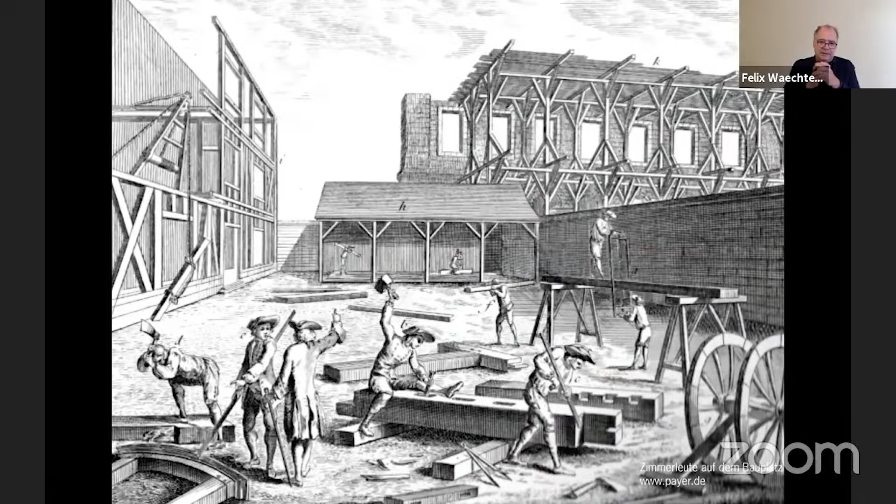Recognizing that in the discourse, in the debate on climate change, probably we suddenly rediscover the old building material wood as one of the building materials of the future, since in contrast to the other building materials as concrete or steel, wood is the most efficient method to avoid emissions.

And on the other side, we recognize that wood allows us also to renew the building process by using modern methods and digital tools in the prefabrication, for that which used to take place at the joinery place, the splitting, the sawing, and cutting to length.

And thinking about the next generation of wood architecture, rethinking construction, we also need to think about the culture, the new culture of design, strengthened by the beauty, the poetry of wood that wants to be touched, smells, breathes, and tells us a story of growth and the patina of use.

One of the three thoughts I tried to share in April, I titled Coherence, the unity of content and form as potential in a new design culture, since wood demands and enables a strong grammar, a serious connection, a relationship between the layers, between the supporting structure and its wrapping, between the construction and the interior, so that the interior does not decline into a moody, fashionable staffage.

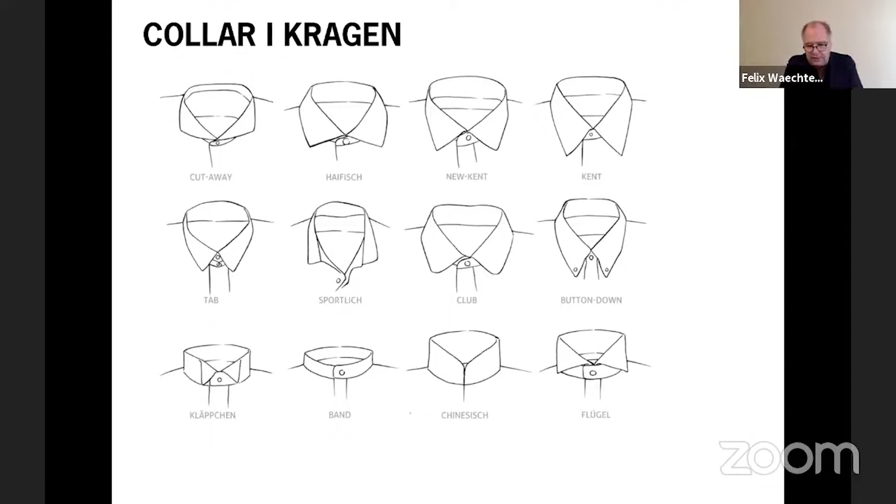The potential in wood architecture is to use the joinery, which enables a close-up view to enrich the architecture.

And the third thought I gave in April was titled With the Virtue of Simplicity, demanding a certain timelessness, a beauty achieved in itself, in particular in the diversity of our age. I'm convinced that simplicity and modesty are still elementary and reliable goals.

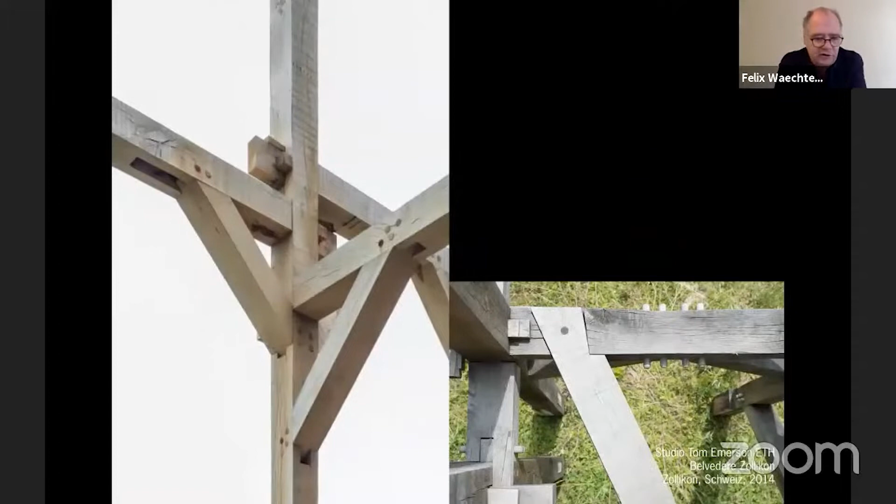While in fluid concrete, the structural logic, the flow of forces, the vertical and horizontal load transfer, and the stiffening is denied or remains invisible, in the linear elements of wood constructions the flow of forces remain visible and allow the joinery to determine the detail.

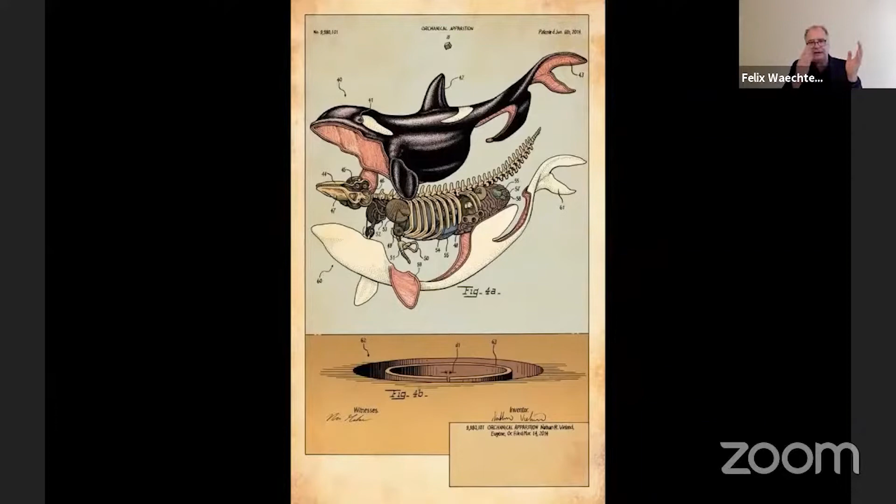So by rethinking wood architecture, one potential is to rediscover the structure as a formative element in the interior, like here in the anatomy, inside the whale, or inside the rabbit. The skeleton, the anatomy, as a formative element of the interior, but also as a supporting and determining structure of the envelope, of the skin of the whale or of the rabbit.

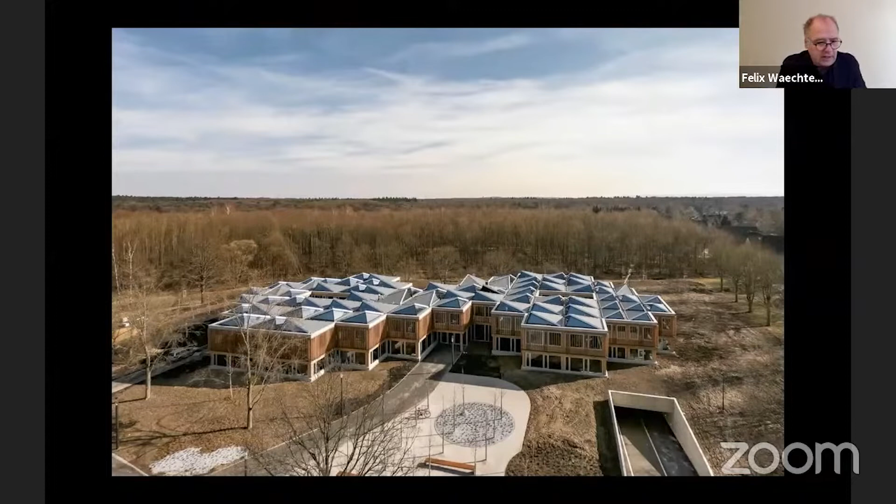In the Academy for International Cooperation in Bonn, the first project I wanted to show you this morning, federal employees are prepared for their work in emerging countries with language courses and the teaching of regional culture.

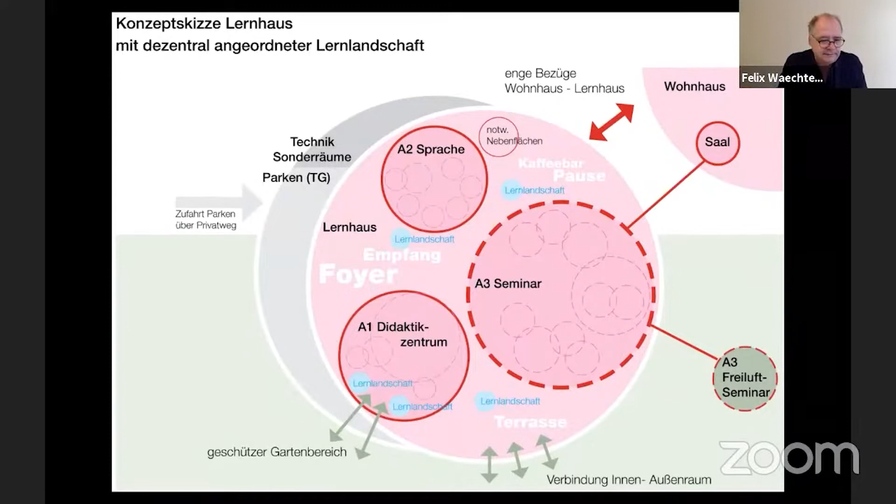There was a competition, and in the competition they gave the didactic concept based on a learning landscape for self-controlled learning processes, as well as separated seminar rooms, especially for the learning of language skills, and a media library. So a learning concept that follows up the discussion we are currently taking up in school buildings with the question: how can we learn tomorrow?

Recognizing that frontal teaching does not correspond to the different learning speeds of kids or students, especially in increasingly heterogeneous societies, and that in a world where you can get any information everywhere, every time, we need to recognize that we need to teach more skills than knowledge.

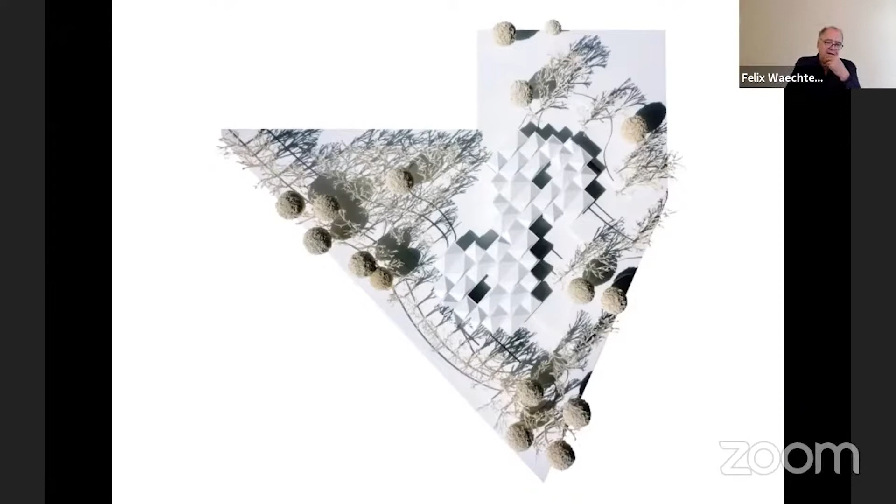So we were looking for an architectural language for this learning landscape, which expresses the restlessness of learning, the searching, the reflecting, the curiosity, and the looking in all directions. But beside that, we thought it's important to do this a little bit disciplined and with a systematic order.

The site we had to deal with was in Bonn, in Bonn-Röttgen, on the edge of this wonderful so-called Kottenforst. The site offers ideal conditions for this learning landscape: calmness, concentration on the one side, but also openness.

Adjacent to an existing seminar building, the so-called Andreas Hermes Academy, with its characterful roof drawn far down, which had been renovated and converted into seminar rooms and a residential building parallel to our project. Right next to this building, we developed a freestanding multi-tiered structure, intended to express this diversity of learning in a lively manner.

The floor plan, the upper floor, is designed like a net, a modular learning landscape, an open communication zone, like two rings, two rings around, every time around a little courtyard.

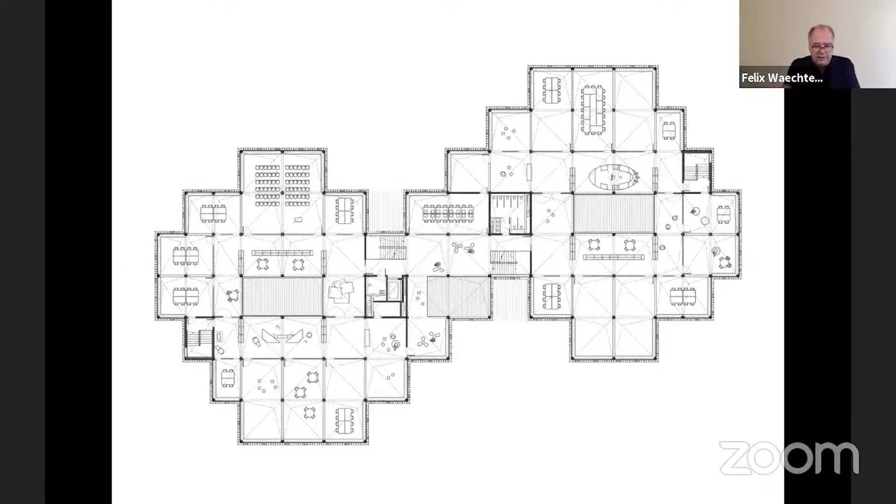In these two rings, this is a learning landscape for learning alone or in small groups, with insights to the seminar rooms, which are at the edge, and different sizes of language rooms, and outlook in all directions into this wonderful landscape.

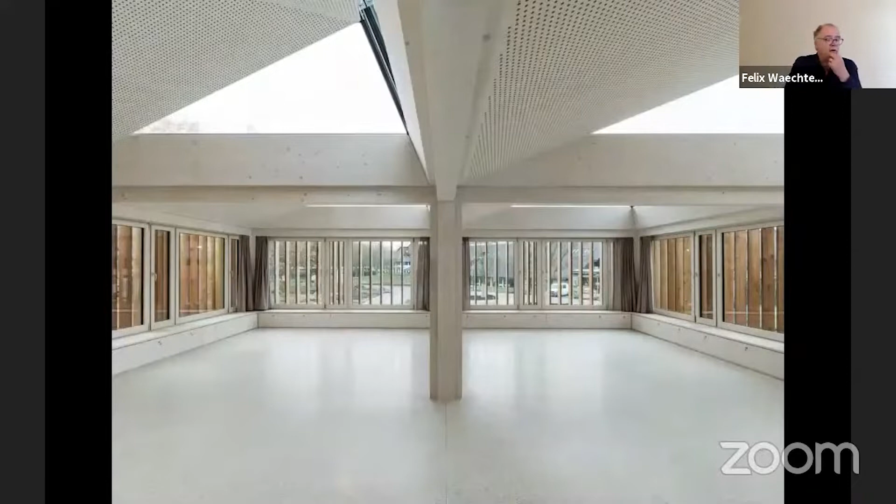For that, the areas can be used as an open learning zone without any corridors and fire protection regulations. The building is divided into 5 units with about 400 square meters each. We were looking for a friendly, light, diverse atmosphere, needed for relaxed learning and teaching.

To illuminate the deep room zones, the roofs on the upper floor are unfolded, pyramid-like, and the anatomy, the skeleton, the structure is built out of a basic 2-story element.

Here you see these 2 stories, the first floor and the ground floor, with the ceiling supported by these beams, by the surrounding rooms, with the ceiling constructed statically just like a hollow box with a statically effective top and bottom cladding to reduce the construction height, so that it's a very stiff and very stable box.

You see it here in the section, the top and bottom cladding and the beams inside. The bottom cladding is perforated so that the ceiling is load bearing, but it's also an acoustic element at the same time, combined and integrated, instead of different layers or additions as we do in solid construction.

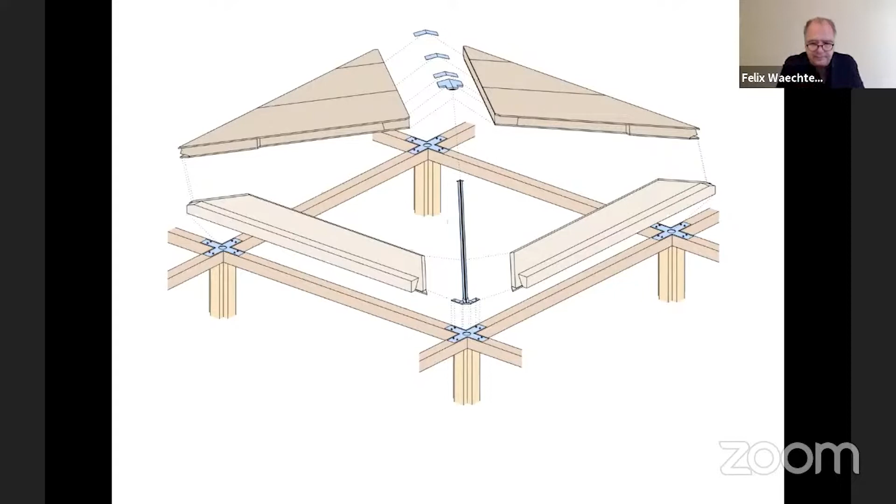Analogously, the pyramid-shaped unfolded roof construction, also with top and bottom cladding, is supported at the highest point by a very small thin steel tube. These ceilings are arranged like a chessboard in alternating directions, so that the beams of the grid are always fully utilized.

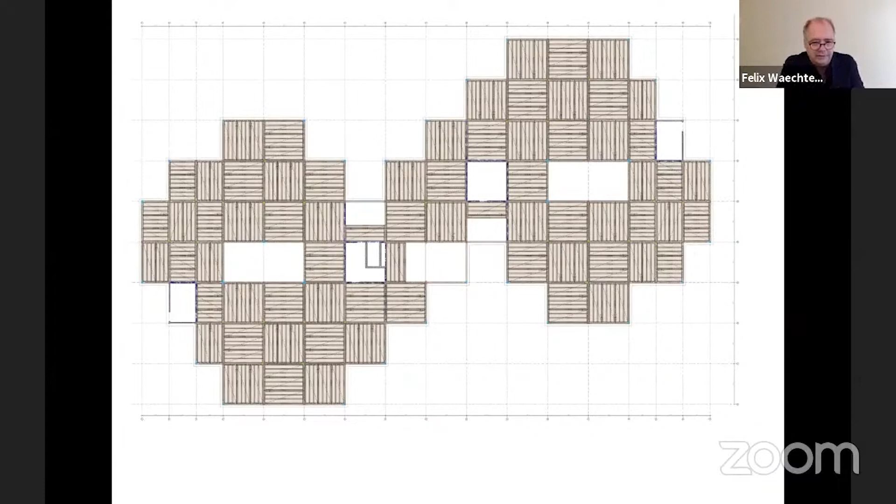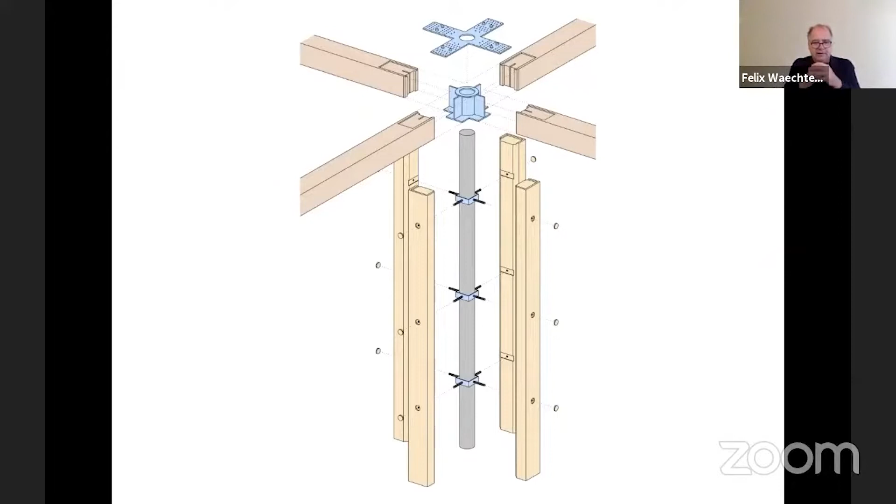The cross-shaped pillars enable easy connections of all elements, and they enable integration of diverse media, especially rainwater.

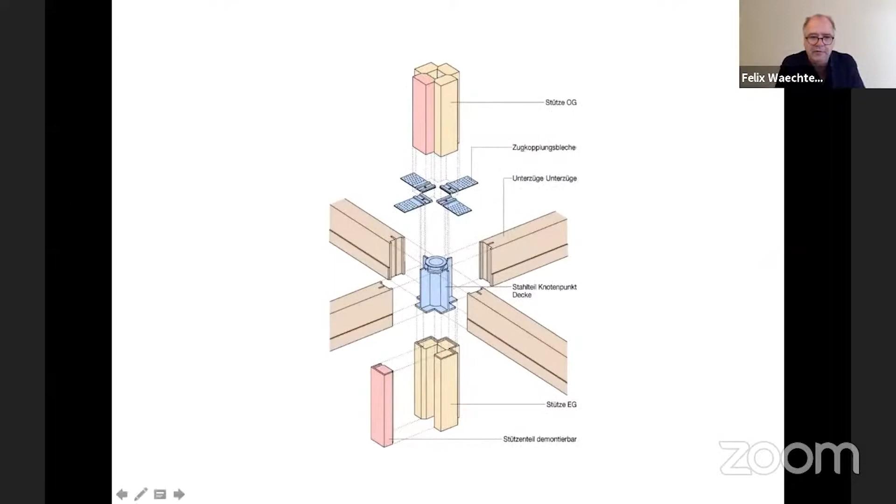Therefore, one of these elements is removable.

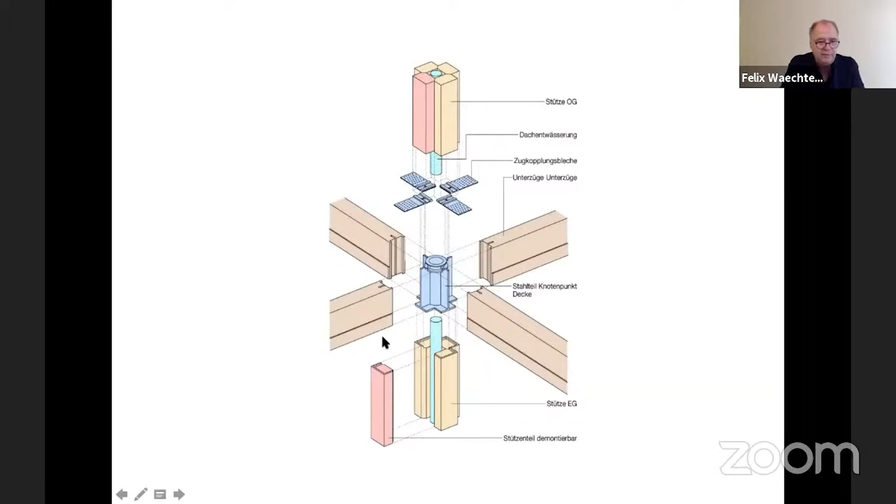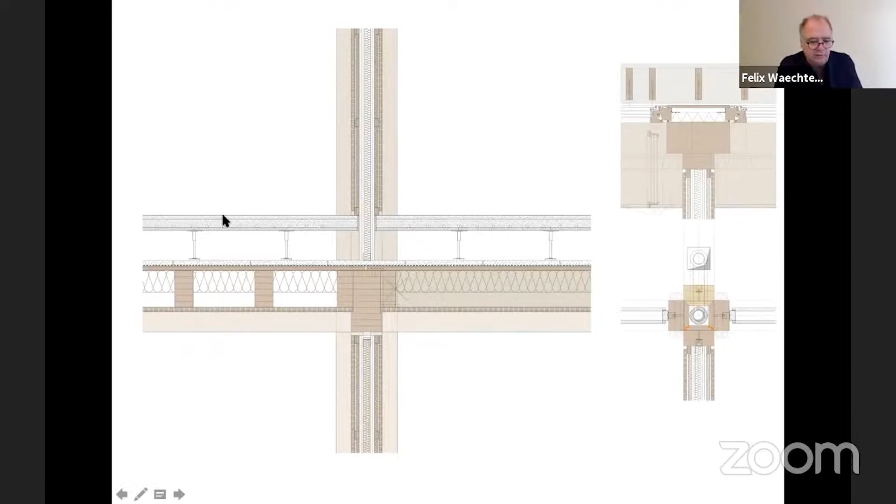Looking at the section detail, you see on top of these ceiling elements some concrete slabs normally used on walkways, placed on the ceiling elements to ensure noise insulation between the ground and upper floors. Within the raised floor, installations are managed, and on top we have a conventional floor construction used for heating and cooling.

In this raised floor we have the supply of air, where every part of these grids can be reached. We try to reduce the amount of air, so it's only transported when the room is really used.

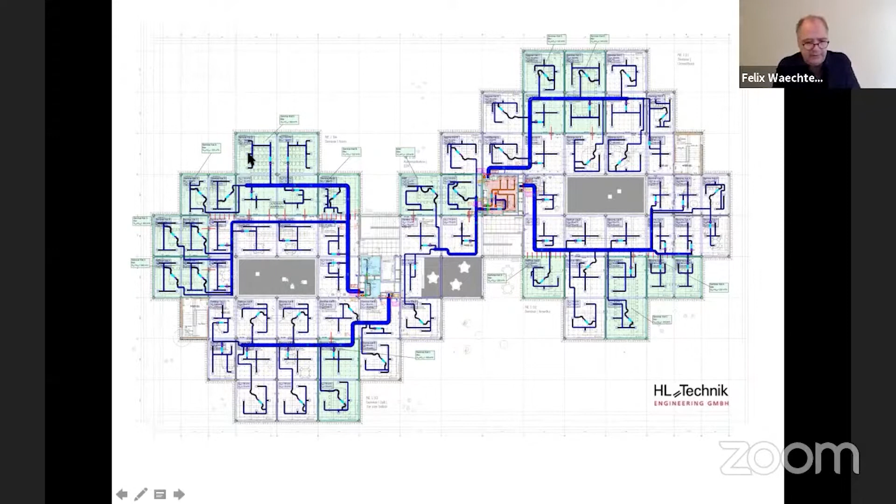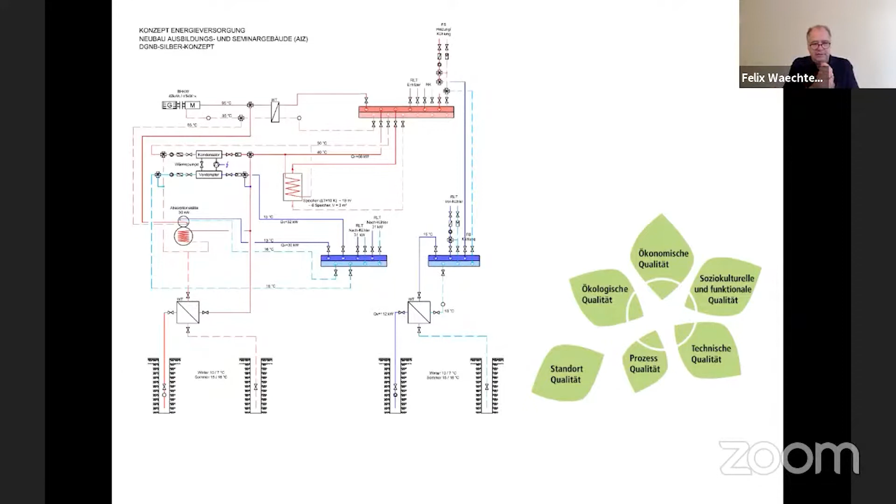The sustainability of the building is proven by the so-called DGNB certificate in silver, which includes an energy concept with a geothermal field as a seasonal pendulum storage, operating in winter as a heat source and in summer as a cold source.

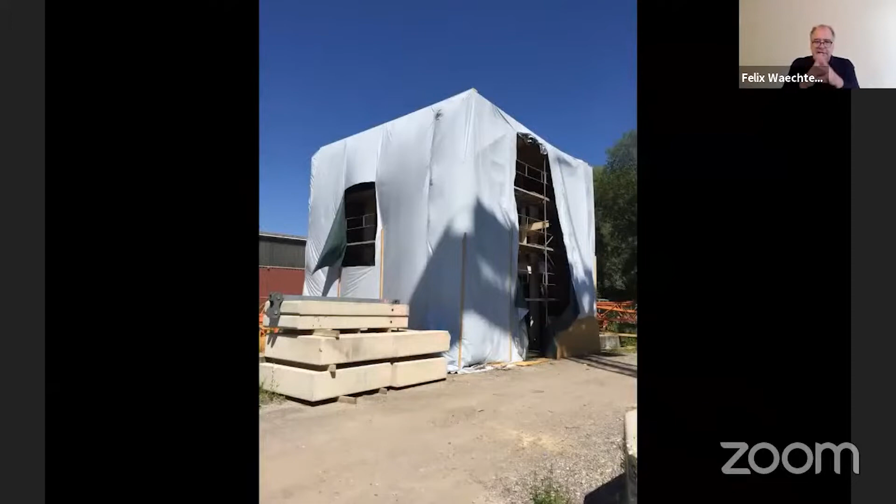Hermann Blumer already pointed out the necessity and potential of building a mock-up. So before the start of construction, the commissioned carpentry previously built one module to test the construction, the mounting concept, and to check surface qualities, as well as to optimize the joints.

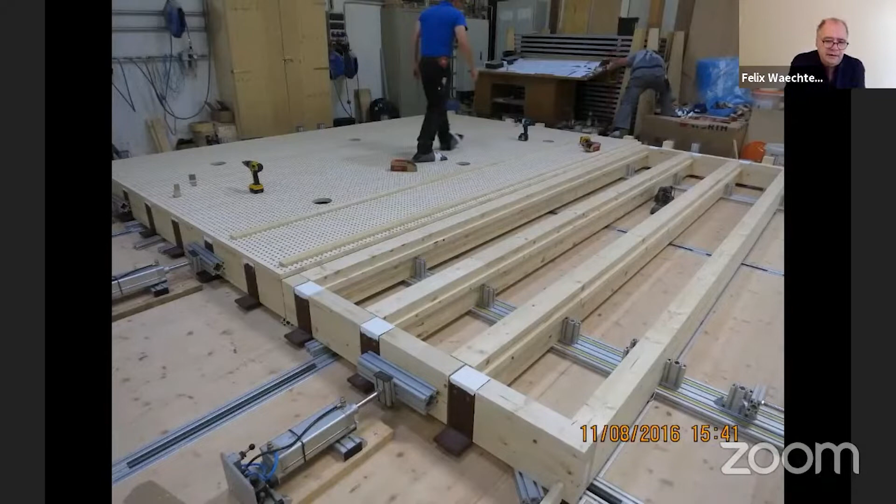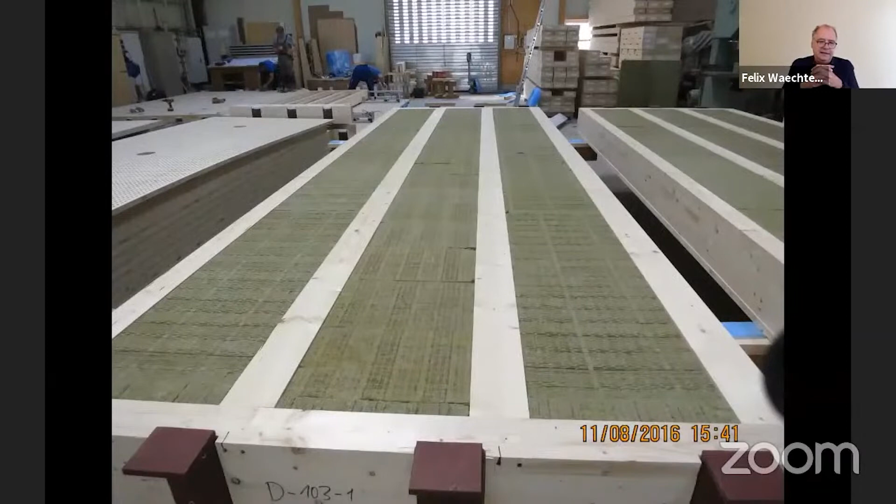The ceiling elements are individually CNC perforated according to our plans. This used to be unaffordable some years ago, but with technical improvement, it's nearly free. Mineral wool is laid in these elements for acoustic absorption.

In timber construction, in developing the structure, transport and assembly must be considered at an early stage in the planning process, and in particular also the weather protection of the wooden components.

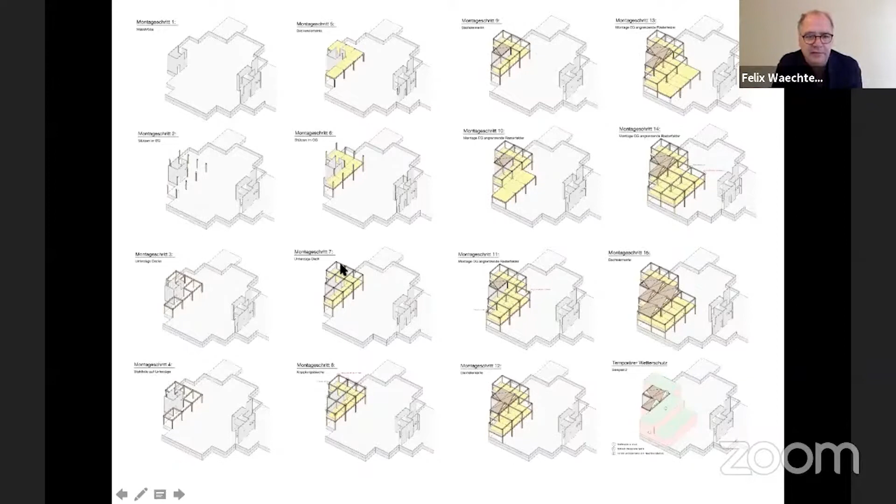For weather reasons, the mounting is not horizontal like in concrete structures, but vertical, as you can see in this story, where you can see how the building process was managed: first putting up the pillars, then the beams, then the first ceiling elements and the roofs, and then going on.

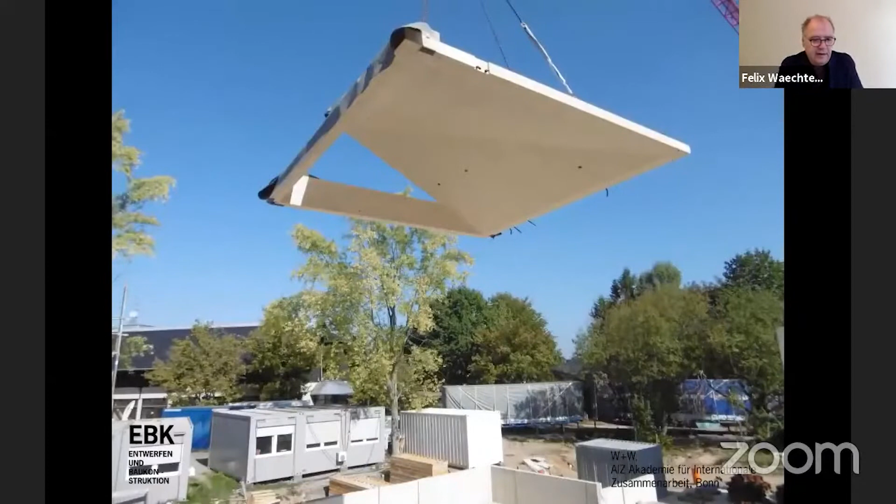The mounting of the elements, here you see the mounting of the first ceiling, is like a Lego-like process, and the roof elements are previously sealed on the ground floor and just put onto the structure.

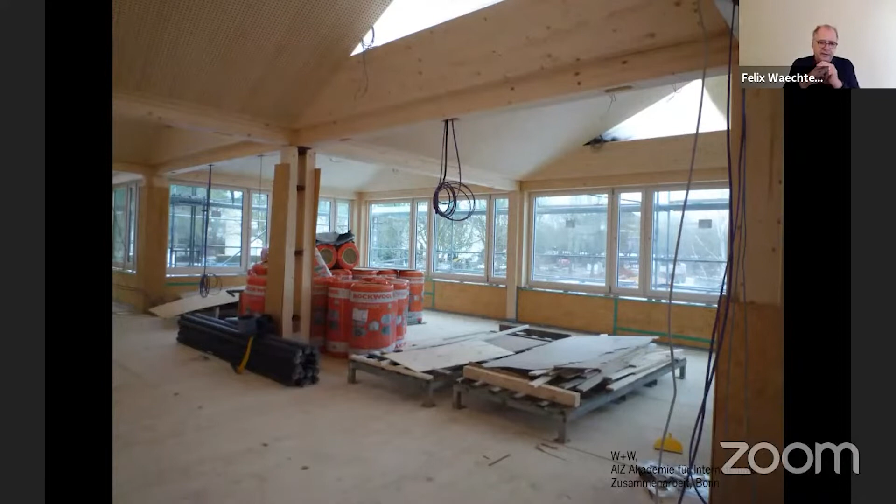Because of the high precision, all interior elements had been prefabricated and installed step by step. By finishing the structure, the skeleton, the anatomy, the physiognomy can be felt everywhere.

The connection between the supporting structure and its envelope, the wrapping, the skin, the veil between the shell and the interior can be felt, so that the skin is not the result of a moody composition or fashionable staffage.

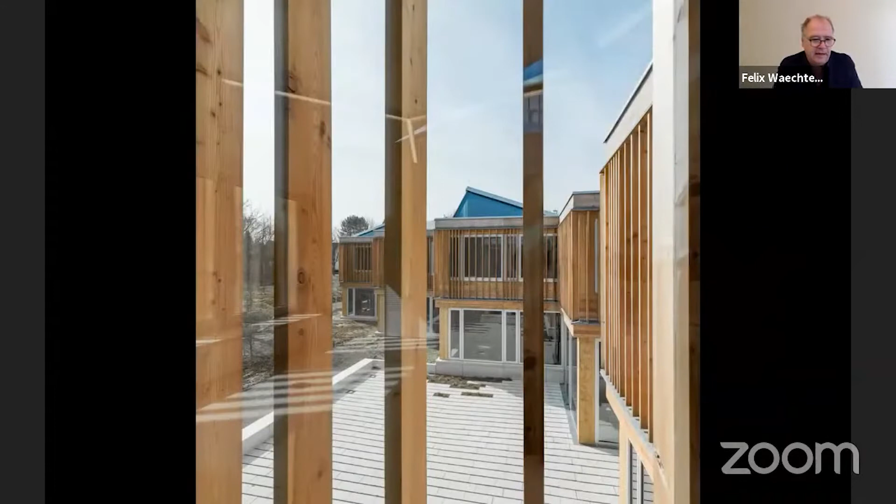With a low height and a pavilion character, the building nestles well in between the existing buildings, the housing neighborhood, and the landscape. It interlocks with the landscape and appears small and in scale due to the stepped and folded facade.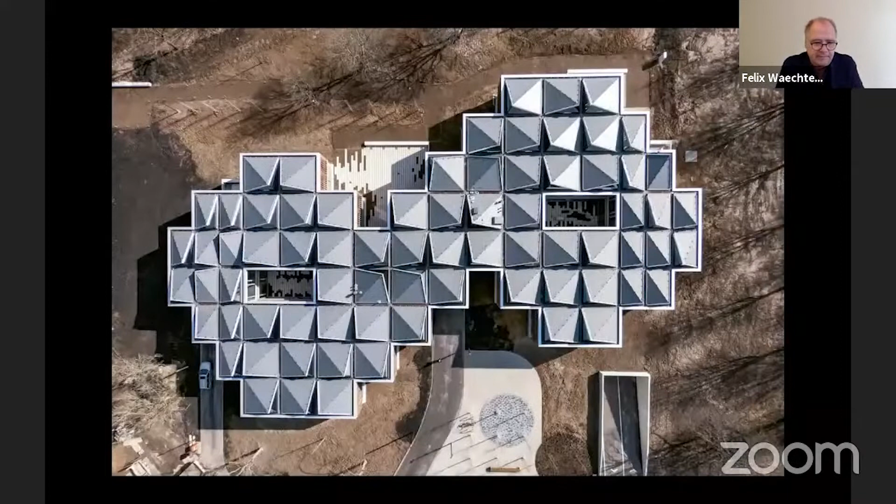Consistently, everything follows the structure, the logic of the concept, without anything being added and without anything removed. So content and idea, form, structure and design are one. We tried to transform this idea of how to learn in an increasingly heterogeneous society, the search for rooms which allow differentiated learning, into a much bigger scale for a school center in Regensburg.

In fact, it's a project for two schools, a primary and a secondary school, and a big gym. It's a very difficult site because the site is sloping, which is hardly visible on this model.

The site is sloping about 8 meters, so it's 2 stories, and the volumes we developed are arranged like a necklace, opening to a series of outdoor spaces and grouped always around these courtyards, forming the playground for the pupils.

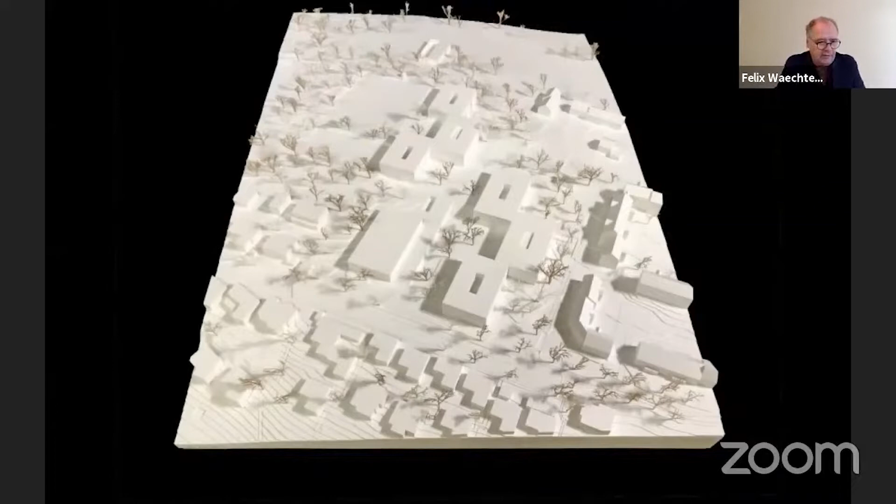With wonderful views from the courtyard and classrooms onto the historic city of Regensburg, the supporting structure determines the appearance to the outside with a dense grid.

And this dense grid allows varied and changing uses on the inside. Inside, we offered pedagogical usable zones around these courtyards, these interior courts. In fact, these are courts, and this is an atrium in the middle, giving space for project-related and group-oriented learning outside the classroom.

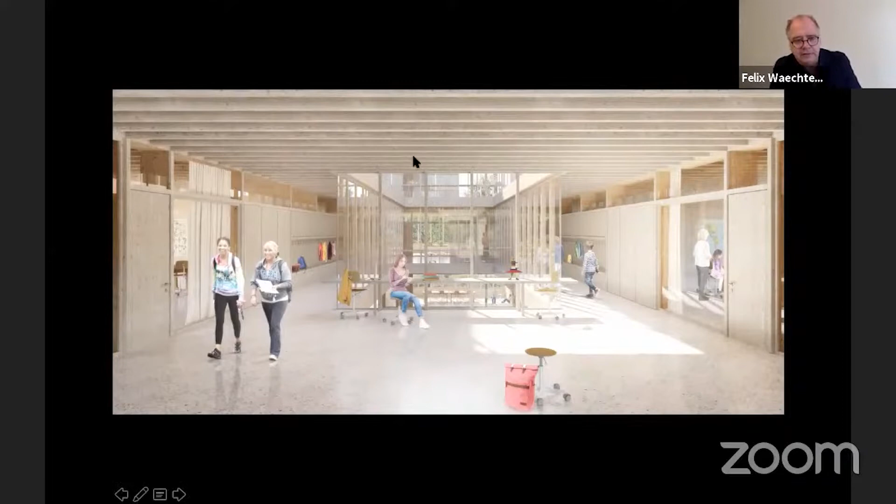But instead of the grid in Bonn, the load-bearing structure gives rhythm and scale on the inside. Here you see the load-bearing structure, but also on the outside, where the structure is put on the outside. It gives a certain plasticity, which is technically useful to avoid overheating.

So this is the pillar. This piece is the pillar, pretty tiny because it's put every meter, and which is cladded outside for weather protection. And this is also the cladding. So this piece is only the structure. And you see the beams inside here.

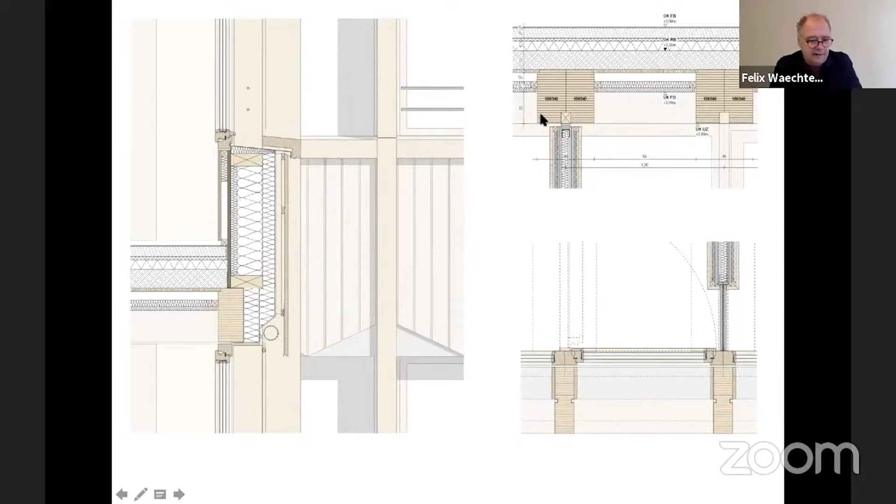So this scheme is rather strict, but it's kind of a frame or a passepartout to be possessed by the liveliness of the kids.

And we are also working on these questions of learning environment in Gießen, where we just recently won a competition for what we call a Berufsschule, a school where young adults are trained in between or beside their apprenticeship.

In the Protestant Community Center situated in Wiesloch, south of Heidelberg, the structure of these slightly diagonal wooden beams characterizes the interior and unfolds the spatial atmosphere and poesy of the common space.

The common space here in the ground plan, the common space which had been asked for in the competition, is set like the central heart, the central organization element, with a courtyard just beneath, around an existing tree. At the beginning of the competition, they said you can do everything, but this tree has to remain, so we planned a courtyard around this tree.

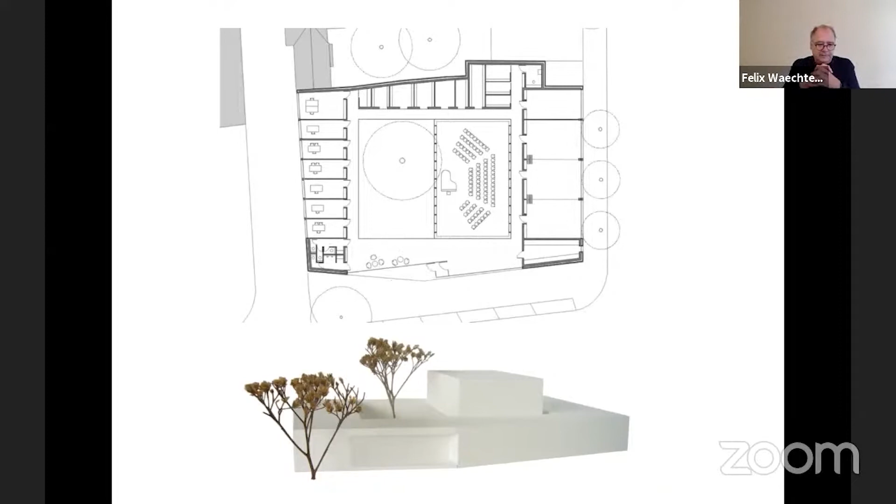This heart is detached from the ring like a cloister. So all the other rooms are arranged around this central room, with the administration rooms on the left and the group rooms on the right, storage room on the back, and the entrance and entrance hall down here, which opens to the street with a large window.

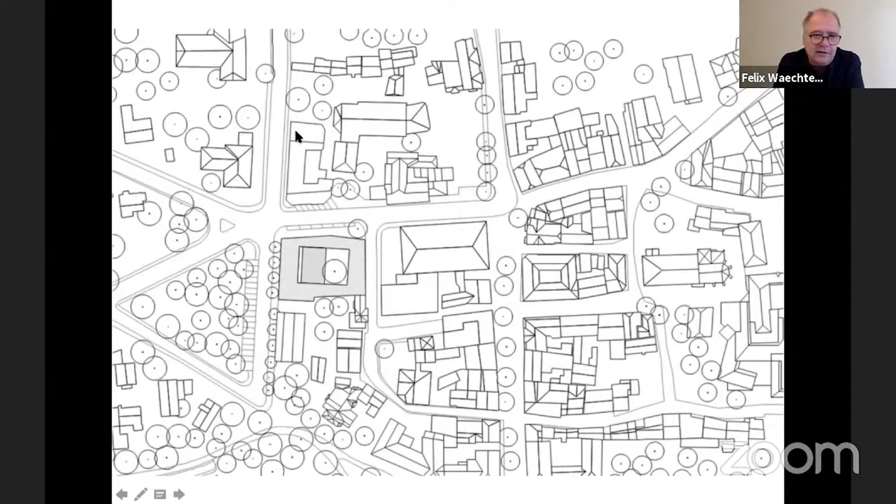In the heterogeneous context, this ring-shaped figure mediates, this urban figure, between the various scales and heights of the neighbors.

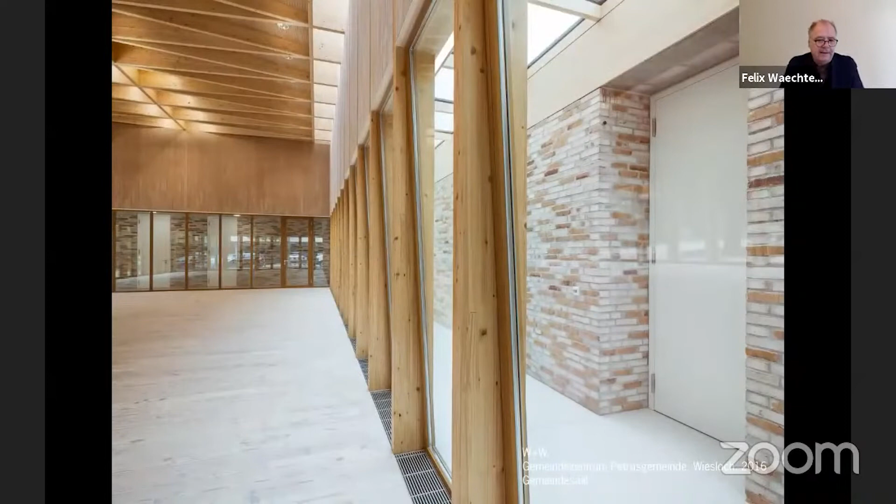Like a wooden instrument, this central room is detached from the heavy base made out of brick, this exposed masonry, with a concrete ceiling.

The logic of the wooden structure, the detail, is not an ornament, but is developed from the doing, tells the story of the making, the junction. It's not attached, not arbitrary, but inherent.

And when you enter the room, you smell the white soaped wood. You hear the absorption of the wooden wall and ceiling panels, and somehow you want to touch the surfaces, which are so rich in texture.

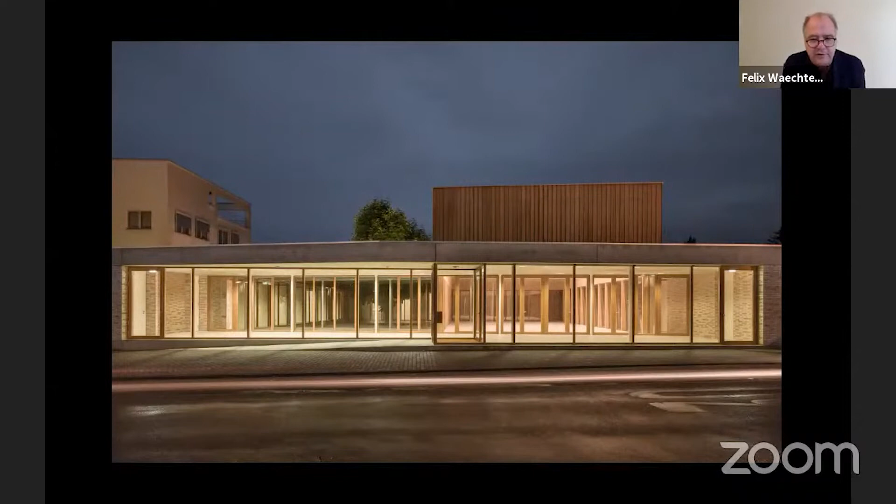In the outside view, the height of this central room manifests that the community, the getting together, is central to this center. And the foyer opens up like a big shop window to the street, to the public, to welcome and invite everybody to take part and be part of the community.

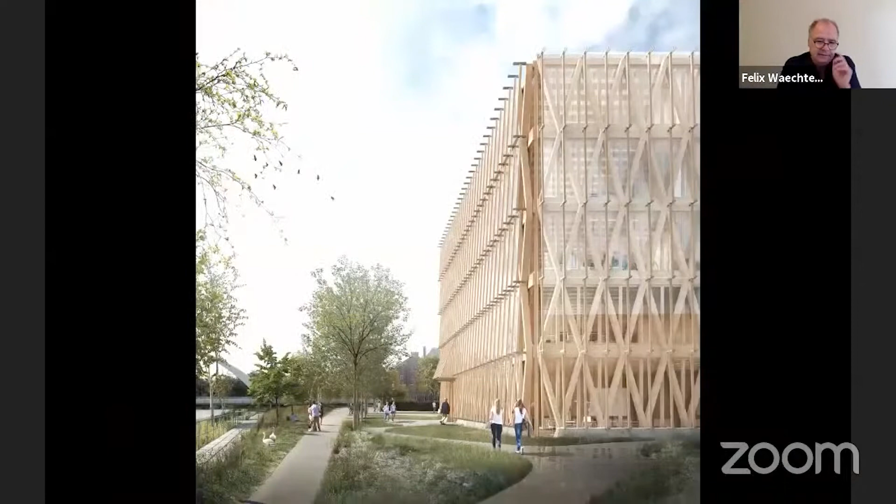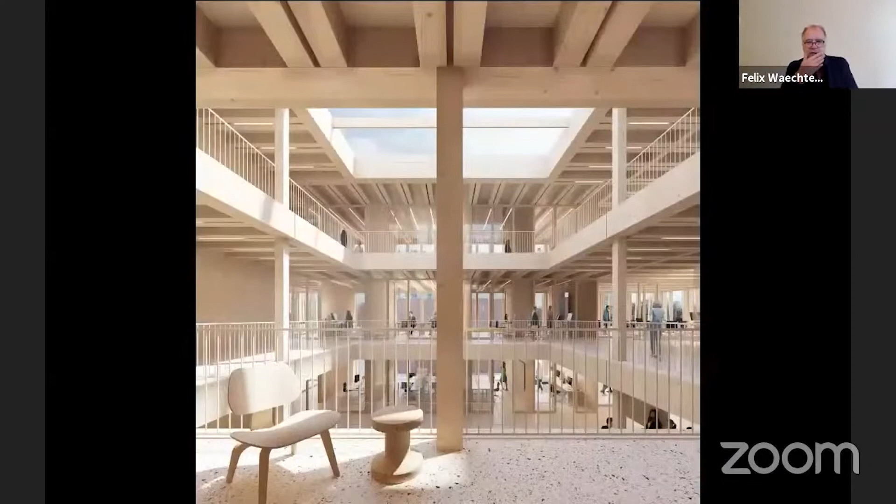At the innovation fabric, we are right now planning in Heilbronn, an office building for young startups. The logic of the wooden construction with this truss-like timber structure, this formative element, determines the character already from far away, but also on the inside, where the inventors, the founders, the co-workers and creatives come together and inspire one another around this central hall.

It's like a think tank and lounge for working and exchanging ideas with one another. That's the idea of this central hall.

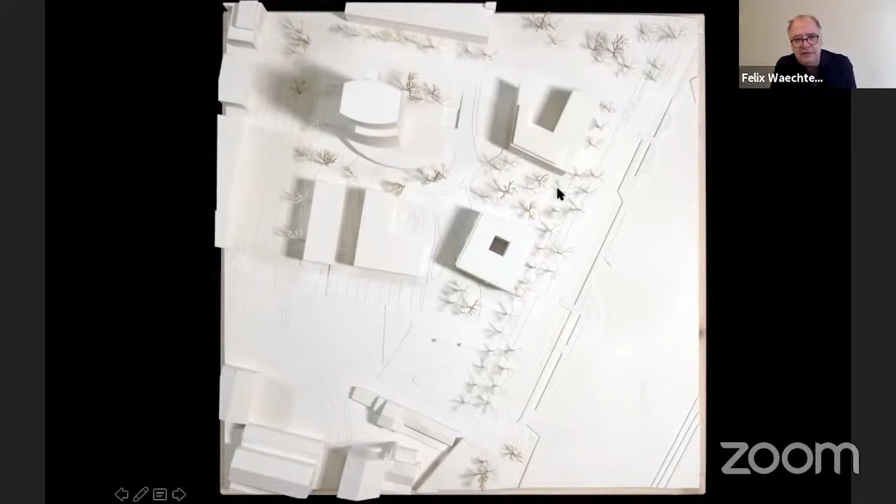In the urban setting, the innovation fabric forms the beginning of this new park, the so-called Neckar-Ufer Park. It's a conversion of an industrial zone, and the urban idea is unusual because we took over this new line, but it's slightly turned by this simple square figure, with an opening to form the entry.

The all-round transparent appearance of the square structure, without any front or back, corresponds to the mission statement of the innovation factory. The hall in the interior is the focal point, enabling easy orientation, promoting exchange, and giving different perspectives inside and outside between the offices, which are arranged outside in this ring and fully glassed into the interior.

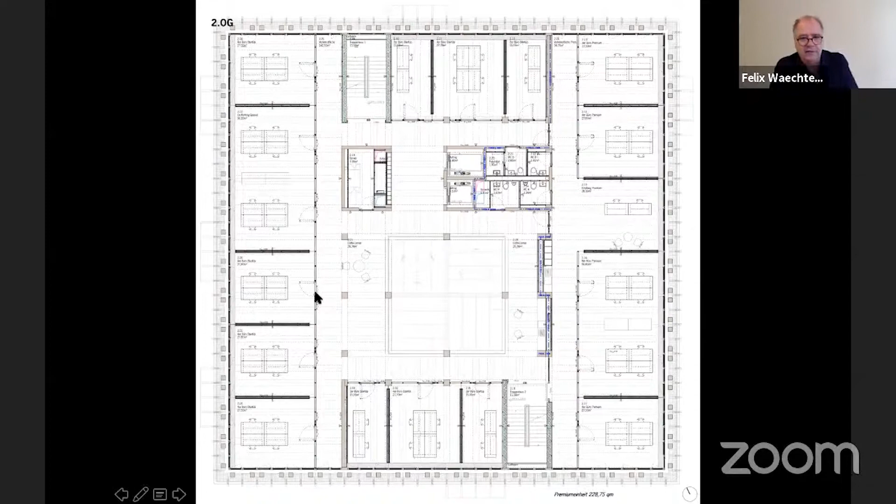The truss-like pillars outside, the facade and the wide span of the beams here allow highly flexible and adaptable plans.

Due to the building height and the open space with this interior hall, we will have to install a sprinkler system for fire protection, shown here in blue, the blue lines, which is quite unusual in office buildings in Germany. I don't know how the tradition is in Denmark and Netherlands, but here it's quite uncommon, although it's a pretty simple technology.

And it allows us to build higher with wood construction. But still, we have to build the fire staircase in concrete.

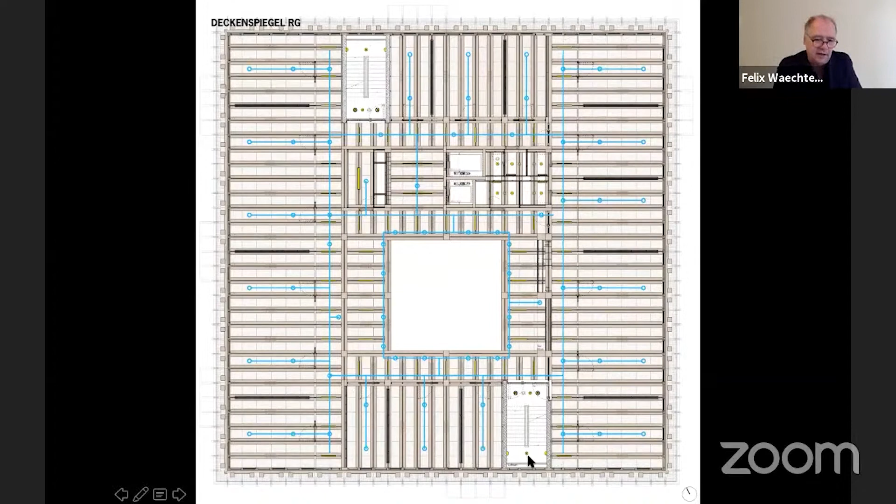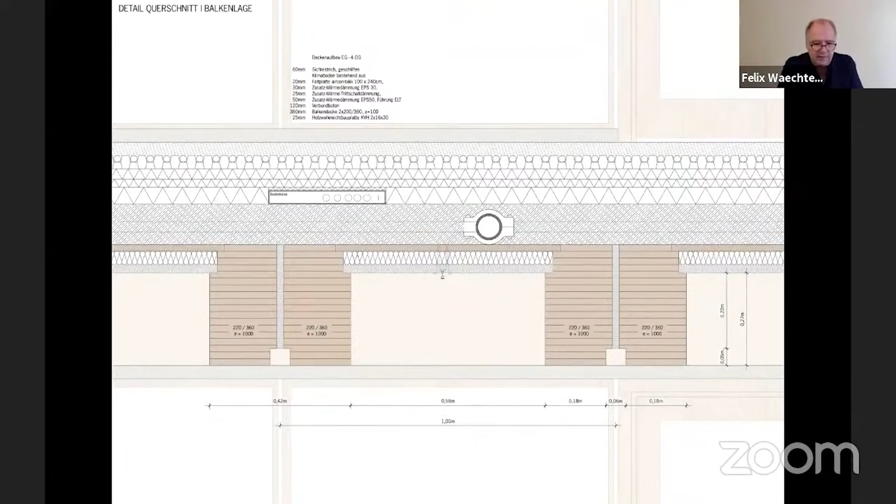So, like the school in Regensburg, the ceiling elements are constructed out of these beams, and these beams form a ceiling element with a panel out of wood chips, serving as a lost formwork for this 12 centimeters of concrete, which serves as insulation between the different users.

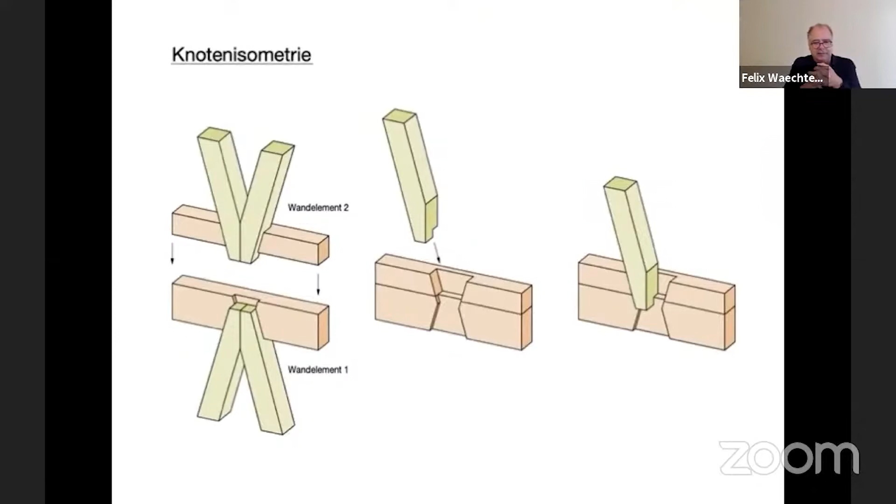And the wood construction is, we try to do without a lot of steel implants, but with pretty simple wood-to-wood joints. To protect the timber construction from weathering, but also due to energy and noise reasons, we developed a double facade, which is good to see here in this detail.

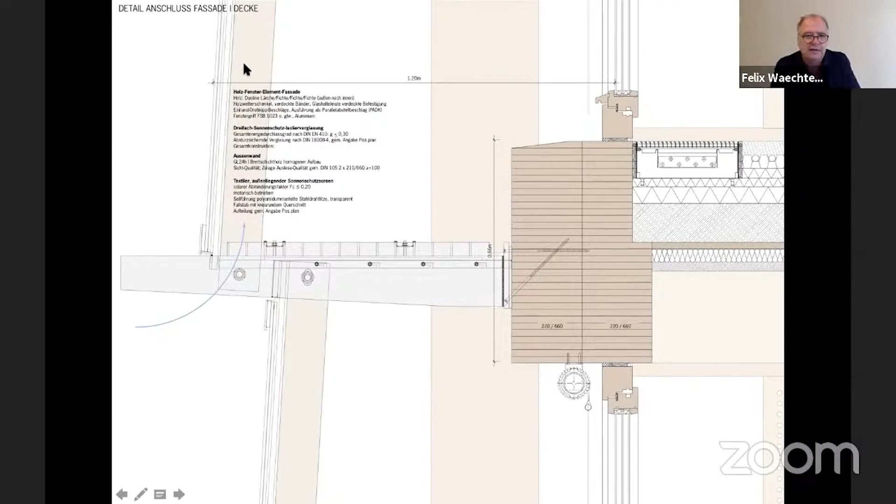Here the insulation facade, and here this wrapping with the single glass, and this outer glass is like an angled layer, and air can go in there and comes out on the top.

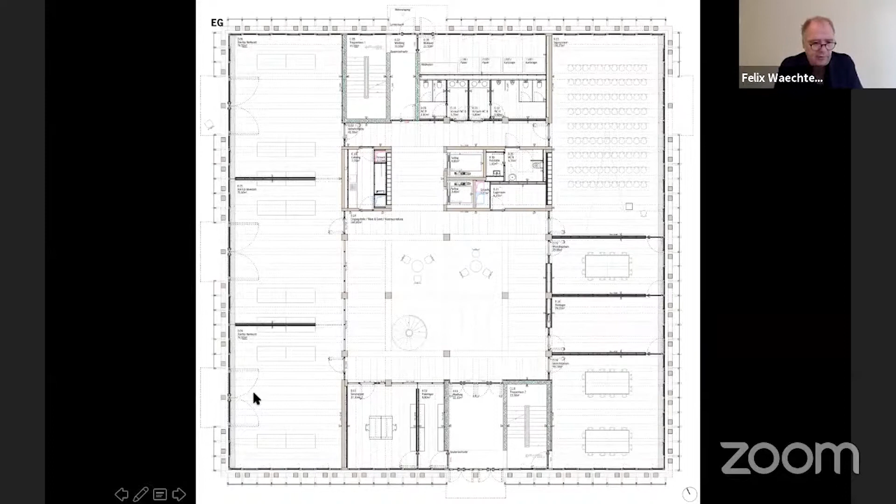The ground floor is used for conferences here on the right hand, here the entry, and on the left hand for workshops, and also here the structure, the anatomy, the skeleton determines the character and the atmosphere.

The assessment center in NEUWIED is another example of a project developed out of the structure, out of a single module, although the module isn't visible at first.

We developed a floor plan which is turned diagonally with respect to the neighboring buildings.

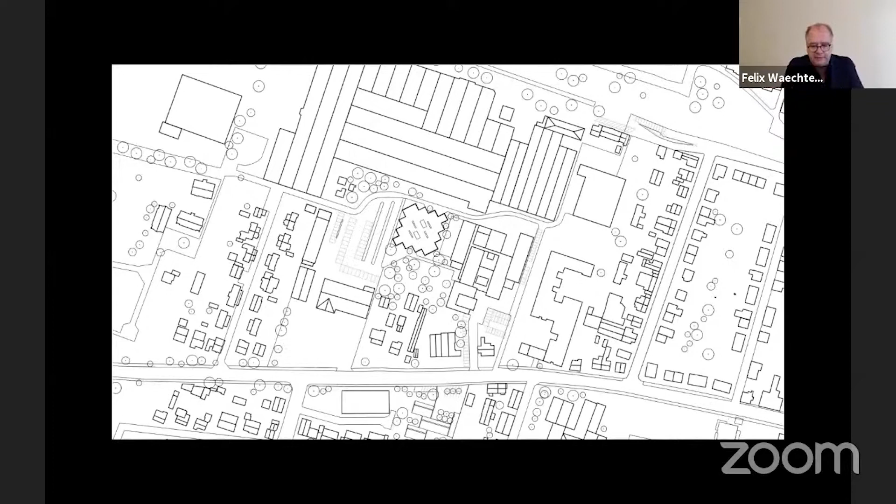But also to enable a scale which can be perceived even by people with cognitive disabilities. The potential of timber construction is to integrate systems which are added in solid construction.

A good understanding and good acoustics are an essential requirement for any learning rooms. Therefore, the ceilings we developed are similar to BONN, the first project I showed to you. They are static and an acoustic element in one.

The basic element, the starting point, are these fine wood chips. They are glued together into these panels with very good acoustic qualities, and they serve as a lost formwork for the concrete we put onto it.

The concrete provides the necessary noise insulation between different levels. So the separations between the levels, but it is also statically effective.

Unlike the pavement slabs we put onto the ceiling in BONN, which lay only loosely on the ceiling elements, here the concrete helps us not only for noise protection, but also for fire protection, and gives us some mass, so the climate is not changing too quickly.

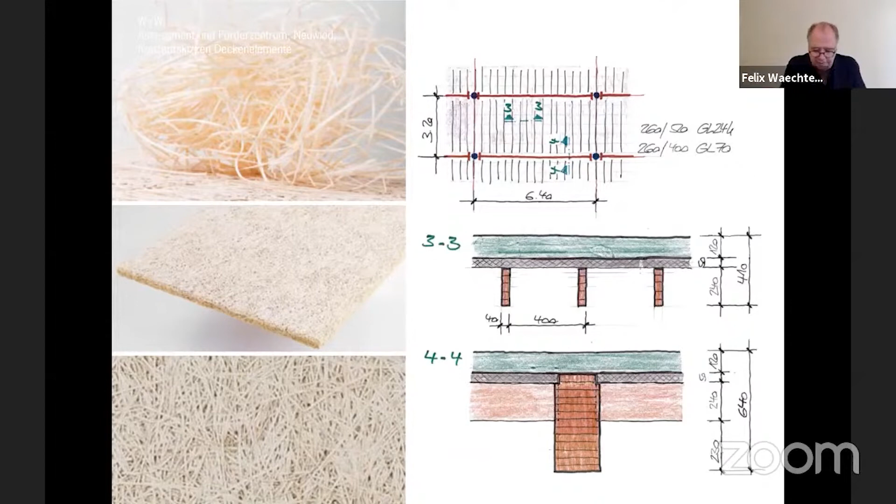From this starting point of an idea, we did develop the module of the ceiling, 3 elements, 3 meter 20 times 6 meter 40, with a frame out of wood 12 times 52.

And in this frame, narrow slats, only 4 centimeters wide, are hung in a 30 centimeter grid. And these slats support the panels of the wood chips, serving as lost formwork and to support the concrete. And screws, which you see here, secure the connection between the concrete and the wooden structure.

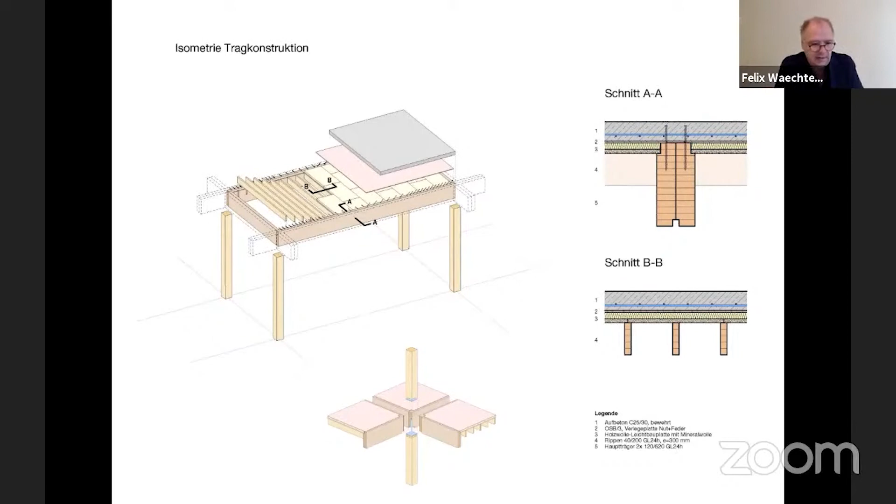These elements are assembled from its single parts, and they are put together into a whole on 2 levels, and form this quite bizarre figure with the working rooms outside.

So Arbeit, Werken, Küche, these are the working rooms, ring-shaped, and they embrace the middle zone, and the middle zone is used in the lower level as cafeteria, and in the upper floor, this middle zone is zoned and illuminated by 2 atriums.

So this is not only a circulation zone, but can be used for communication between the participants as well as between the teachers. So for individual teaching and learning.

So here you see again the plan with the working rooms at the outside, the fire circulation, and these 2 atriums illuminating this middle zone, and in between you have these rooms, the toilets and storage rooms.

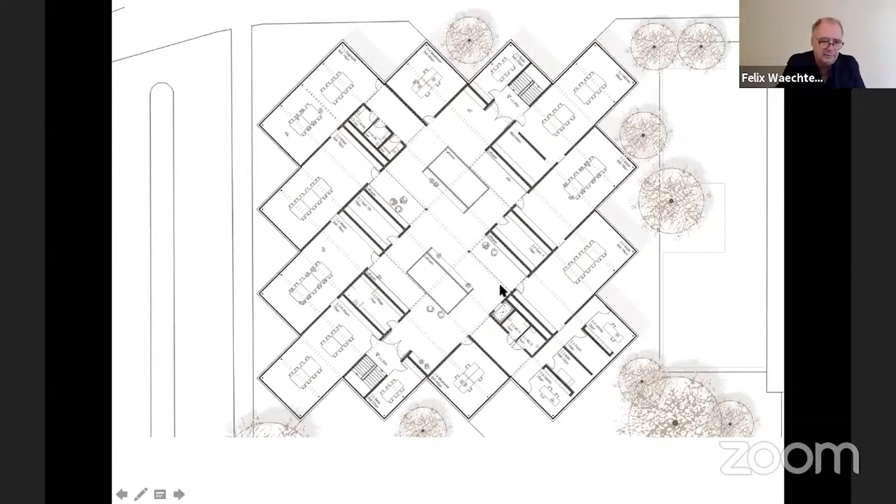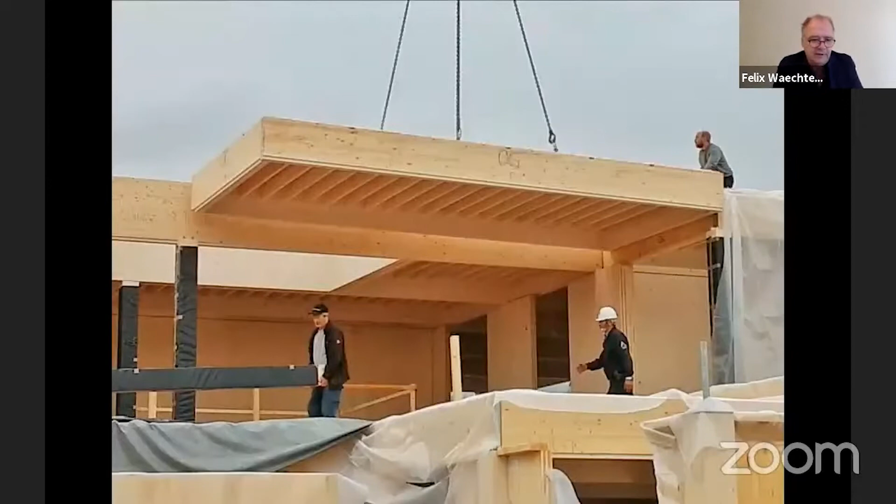These ceiling elements, 320 by 640, are easy to transport and can be prefabricated at the carpenter's space. Here's the mounting of one of the ceiling elements - you see the frame, the slats, and the panels. Due to the prefabrication of the ceiling and wall elements, the mounting could be finished in only 3 weeks. 4 ceiling elements are supported at their corners by wooden pillars, 24 by 24 centimeters.

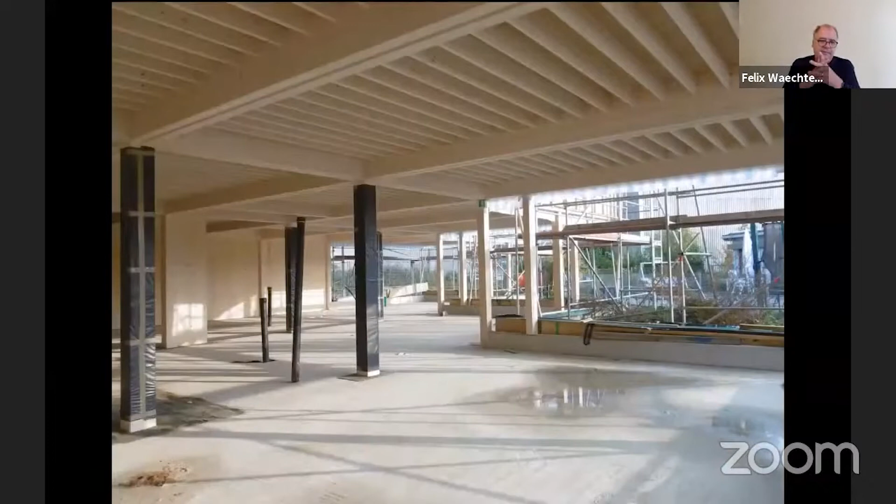They are put together into an orthogonal structure. Its expression is characterized by this fine rib structure. Here's a look into the upper floor, with this one of the atrium, and on the right is the second atrium. You see the structure which gives rhythm and characterizes the interior.

For young people with different disabilities, the time in an assessment center is important, since here directions are taken for their future life path. That's why it's necessary to create an inspiring and motivating architectural environment for the time of their internship, applicant training, and diagnostics - inspiring and motivating both to the external experience as well as the quality of stay inside.

Instead of empty dark corridors, the teaching rooms are grouped around this middle zone and open up to these educationally usable areas in between. The corner exposure of each of the classrooms, arranged in this ring form around the atriums, enables multi-sided exposure throughout the day.

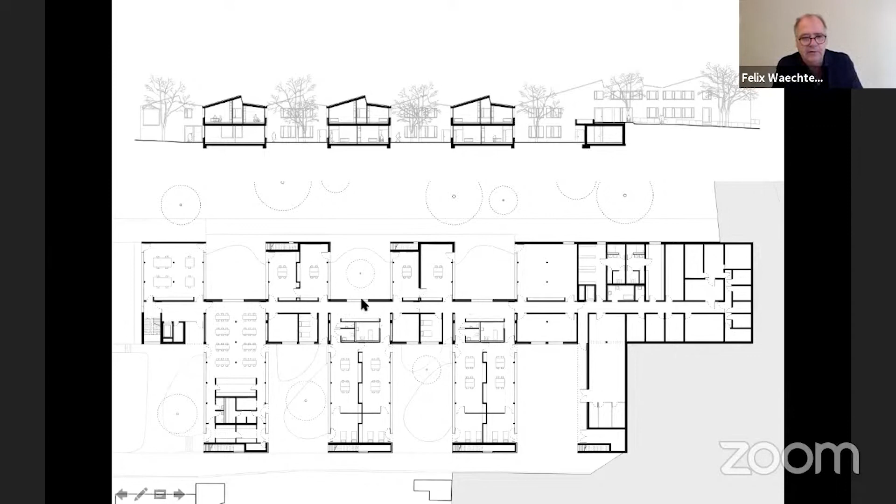They open to the courts, and they are also aligned along the interior street, which opens up also to the court. So it's lit by this court.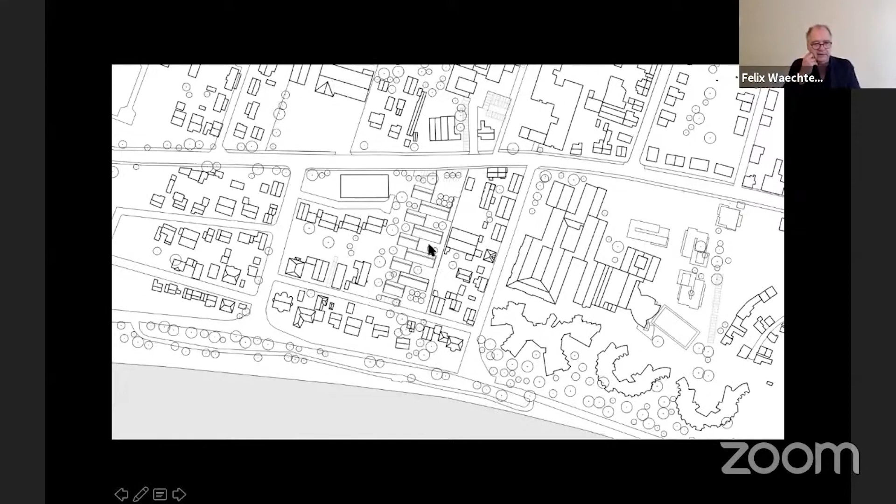Despite the unity and the repetitive elements, the buildings react in their scale to the surroundings - the areas with the housing area here, and then these more institutional areas here. They somehow quote the scale and the width of the houses here to the left, so the house is integrated into the surrounding.

The structure of the ceiling element is 3.60 meters by 10.30, and it's built out of these beams. They are put together and clad on top and on the bottom, statically effective, and we put mineral wool into the ceiling.

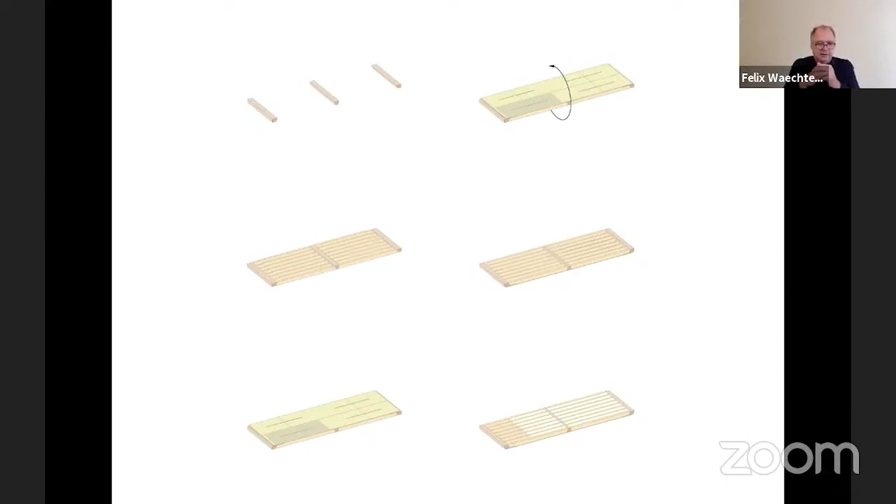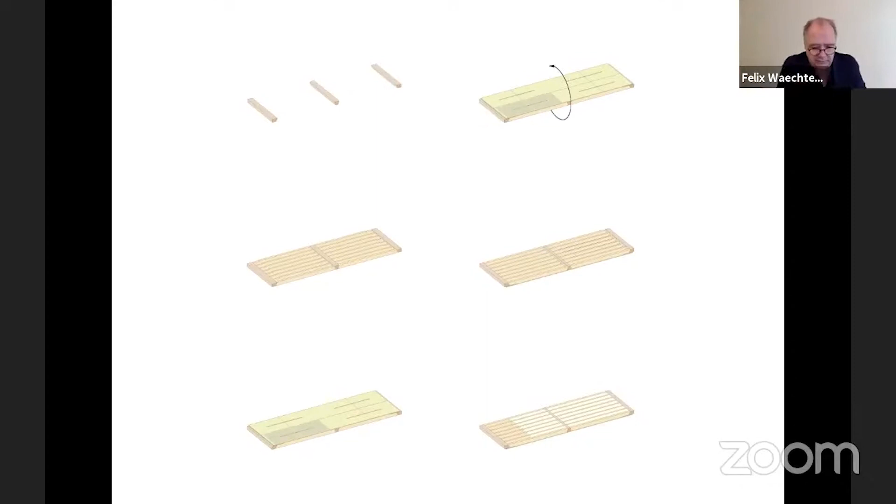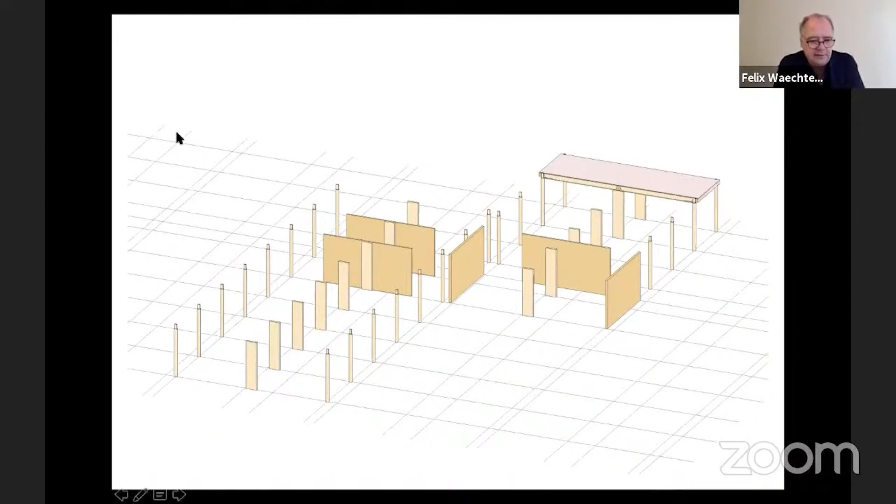So again, this is not only a ceiling element - it's not only load bearing, but it's also an acoustic element at the same time. These elements are point-supported with pillars at the edge, and 60 centimeter pieces in the middle, which is used for storage space, with some stiffening plywood walls in between carrying the ceiling elements, 2 stories high, allowing different and changing uses.

So it's very adaptable, with a sloping roof for fitting into the surroundings, offset. Here you see offset in the middle, to illuminate the room in its depth, or the rooms which open to the court, or to illuminate the corridor, so the corridor is light instead of dark. The rooms open into the space in between the 3-sided courts.

The repetitive typology enables subtle setting and gives scale and orientation also for the users and visitors with cognitive disabilities.

Working on a project for multiple disabled children in the Rheingau area west of Frankfurt, we looked for a low-cost construction with a very simple structure, with short spans. Three houses, 1, 2, 3, arranged around this common courtyard.

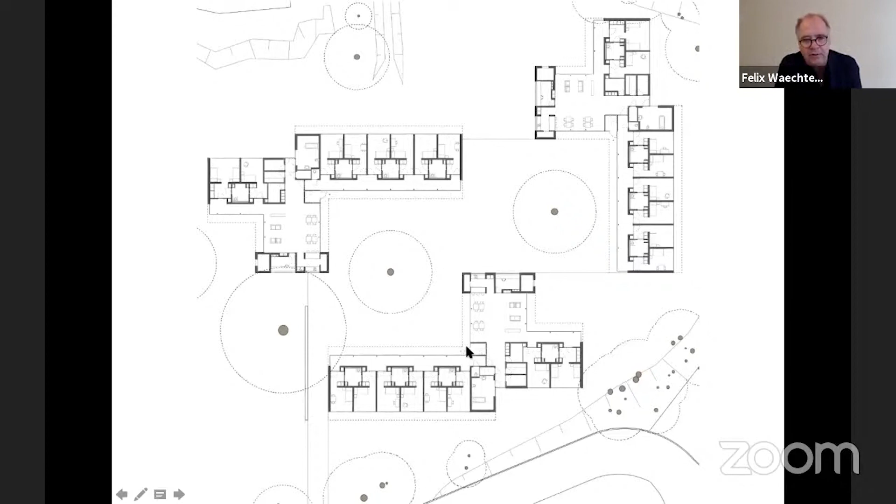9 children live in each of the T-shaped houses with the rooms oriented outside to east, south, and west. North is here on the left, looking outside into the park, with a living and eating area here, with the kitchen and nursery room attached, and with the entry always in the corner of this T-shaped plan.

In our search to avoid any hospital-like atmosphere, as is common in these institutions, we developed a pavilion-like structure with an interior that opens into the landscape, allowing the outside to become part of the inside.

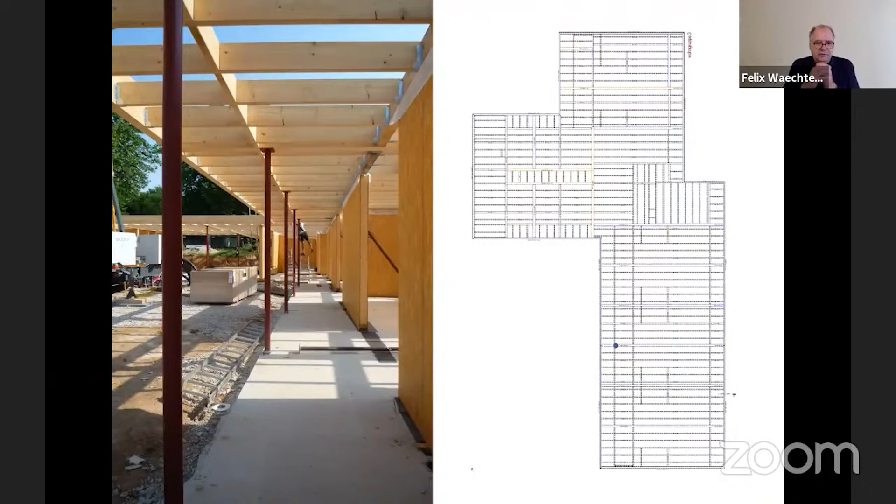This simple plan is translated also into a very simple structure, with wooden frame walls and beam ceiling with only short spans. Here the structure is hidden inside; it's not visible. It is only serving, not a formative element. Everything is concentrated to strengthen the connection of inside and outside.

The cantilevering roof expands - here you see it on the left and right - expanding the common living dining area and creating an interesting room in between, a threshold between public and private, belonging to the home and to the court at the same time, which is widely used today.

So, next, are there any limitations in timber architecture? When building in wood, besides all the building regulations, besides all the fears everybody has about wood in architecture - since wood is the historical material of the city, we have to recognize that wood is not the building material only for rural areas, but can be used in every context.

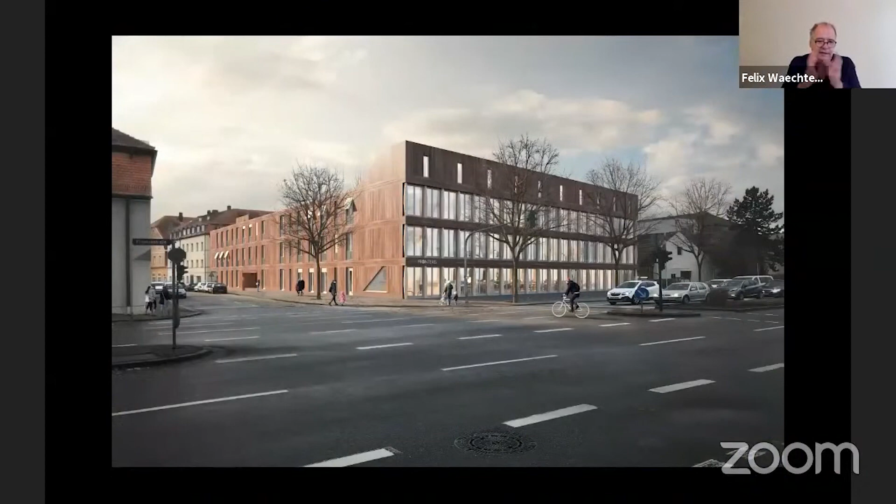Clearly an answer from our time, but woven into the historic context, taking in the regularities of the surroundings, such as heights, proportions, and colors. The idea is to live around a central courtyard, a court like in Alfred Hitchcock's famous movie, a synonym for community, a space for identification and communication, and meeting point for residents and for community activities.

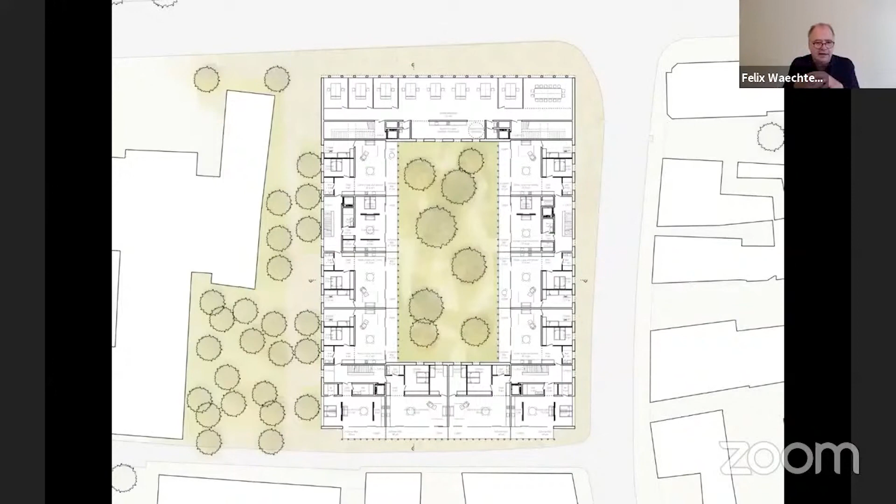In this sense, all of the apartments are lined around this inner garden and open up to it. So I don't see any limitation in where to build, but I also see no limitation in what to build, in the case of typologies.

Of course, everything may be built out of wood. Here's a study for a concert hall in Tübingen next to a central bus station, which we developed at my institute at the university - very high acoustic demands for the noise from outside, but also for acoustics inside. What we developed is a double plywood wall construction built up with sand.

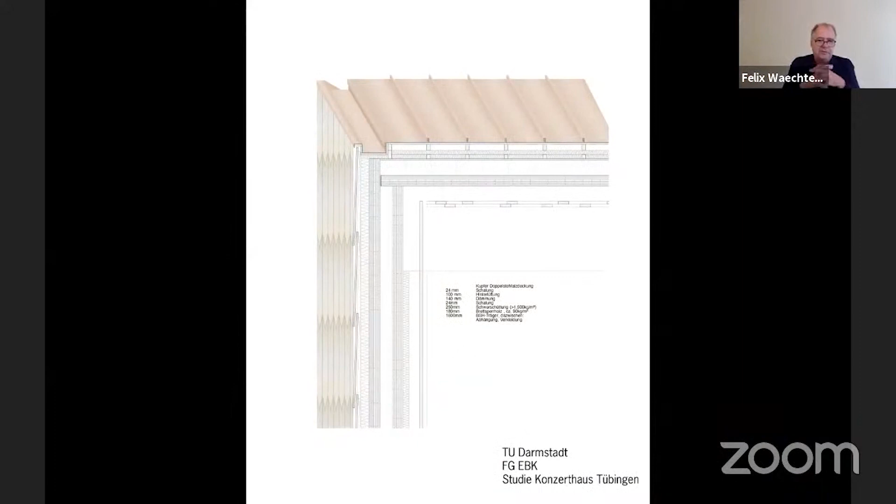Here you see the sections. So this is the plywood wall, and in between we put some sand, and we tested it and got very good results.

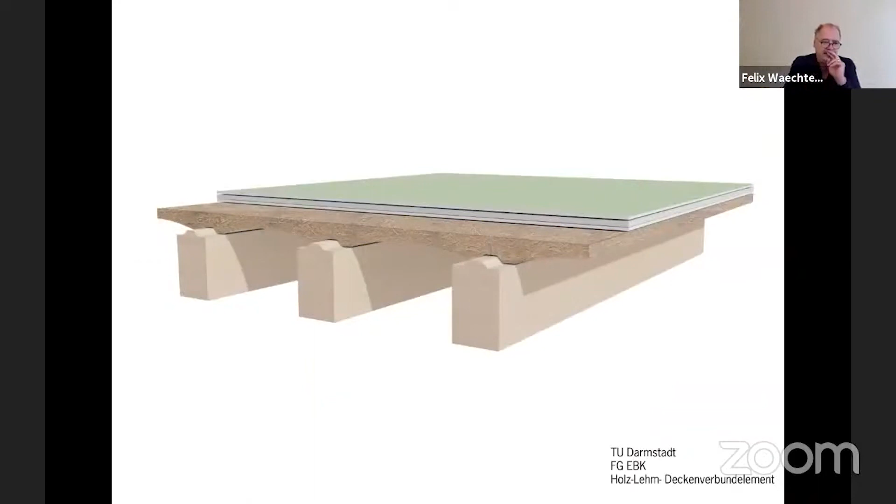At the same time, the construction methods, especially hybrid constructions with other natural building materials, are not yet exhausted. Anne Beim pointed out her research yesterday evening. We are working on wood-clay composite ceiling elements, which you can see here - a wood construction with a clay component, and this clay component is also used statically. So we are searching on how to combine these.

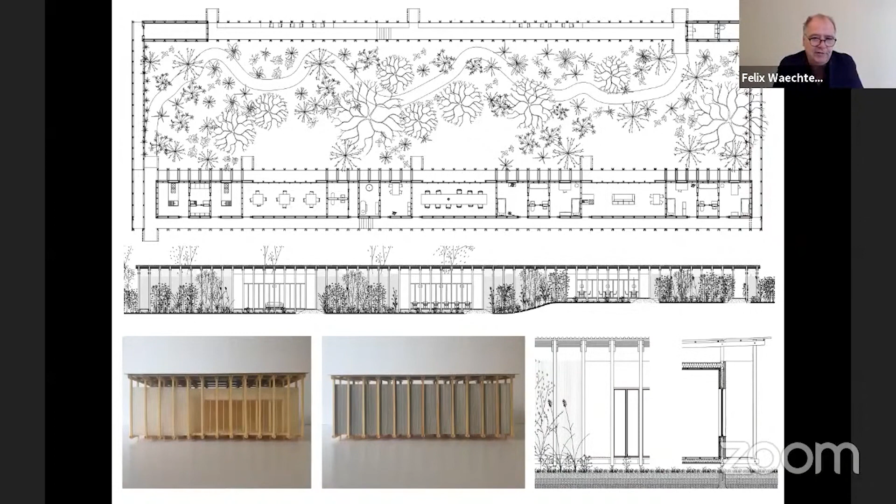And we try to convey the magic and beauty of wood architecture to students early, in the third and fourth semester. You see here a studio project from last semester, fourth semester - the entry building of the zoo here in Darmstadt. And I would be happy if the 2 weeks we are doing in this workshop contribute also to this.